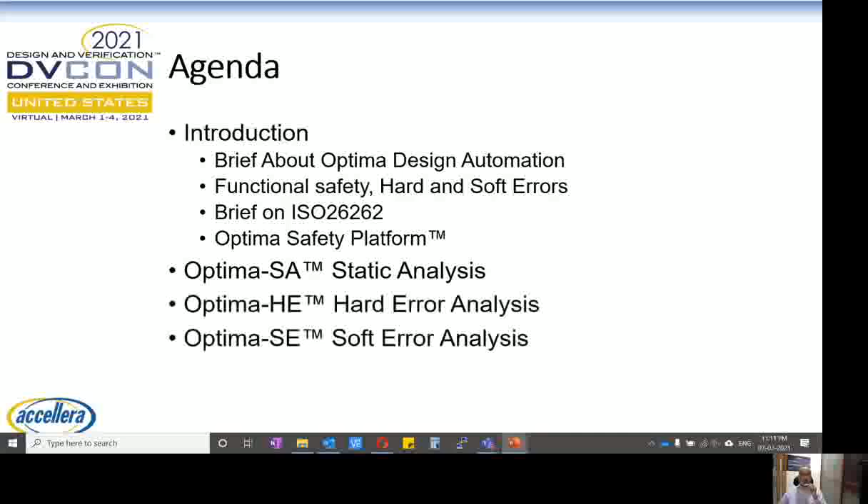2021 workshop on achieving ISO 26262 ASIL metrics using modern static and dynamic failure mode fault analysis by Optima Design Automation. The agenda today: introduction on Optima Design Automation, functional safety, hard and soft errors, a brief on ISO 26262, and Optima Safety Platform, followed by details on Optima SA static analysis, Optima HE hard error analysis, Optima SE soft error analysis, and we'll end with Q&A.

Optima Design Automation is the next generation automotive functional safety tool provider, founded in 2014 in Nazareth, Israel. We have a portfolio of advanced solutions for complex safety and security challenges, a revolutionary high-performance fault analysis technology, and we are a well-funded organization with a core team of verification and safety experts.

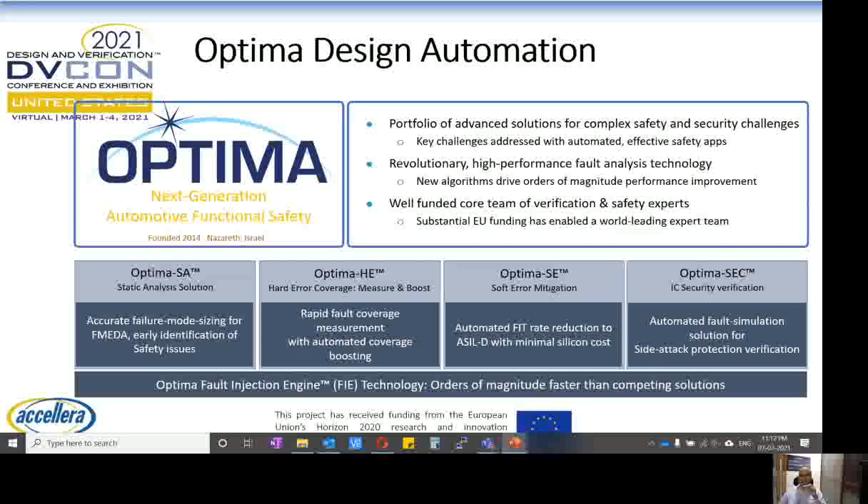Optima fault injection is the core of the technology, orders of magnitude faster than competing solutions. Above the Optima fault injection engine, we have built Optima SA static analysis solution, Optima HE hard error analysis, Optima SE soft error mitigation analysis, and Optima SEC IC security verification. I'm Sesha Kumar, Director of Application Engineering, and I'm a certified semiconductor automotive functional safety professional.

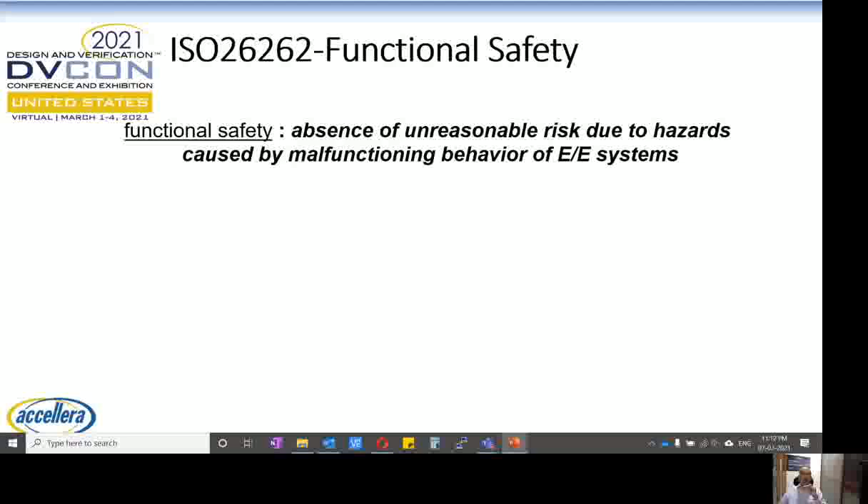ISO 26262 defines functional safety as the absence of unreasonable risk due to hazards caused by malfunctioning behavior of electrical and electronic systems. The average car today uses 300 processors, 50-plus complex electronic control units. It's used everywhere: airbag deployment, event data recorder, voice data communications, accident recorder, battery management, lane correction, parking systems, regenerative braking, etc. There are many functional safety standards available for each and every industry.

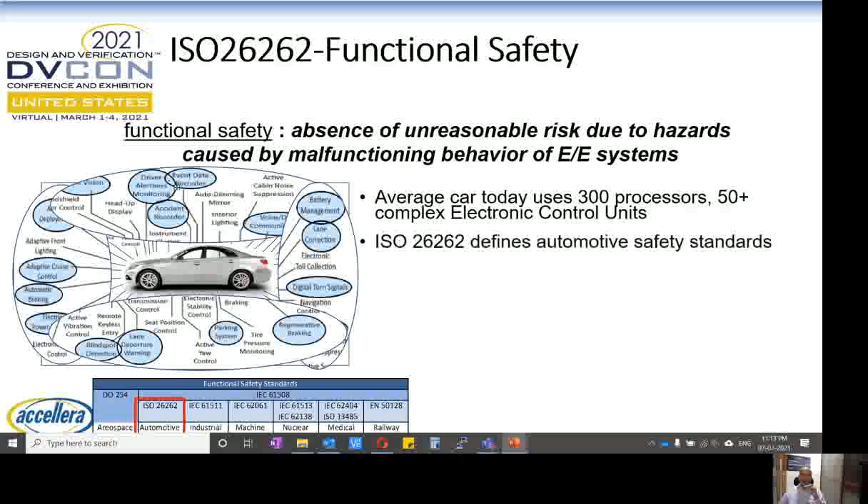ISO 26262 defines automotive safety standards. ISO 26262 follows a V model, which defines the verification process throughout.

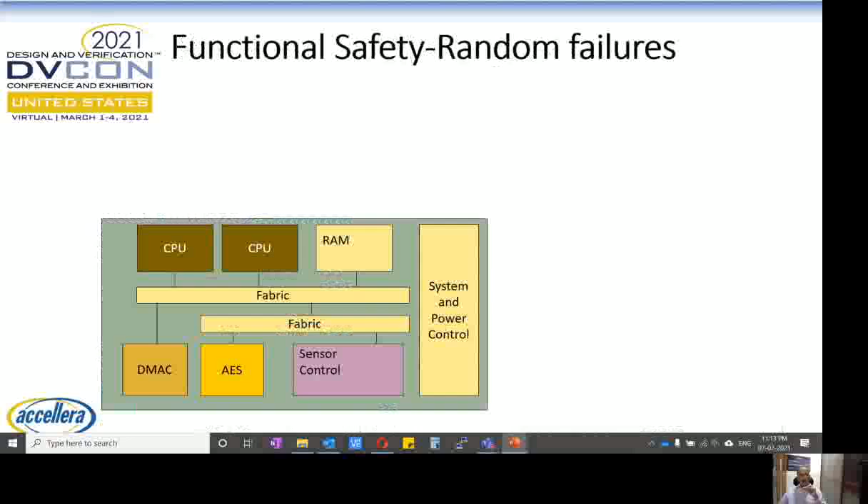Functional safety issues: ISO 26262 defines random faults. Faults that occur during operation can cause failures, termination of intended behavior. To correct random faults' effects during operation, you need to use safety mechanisms.

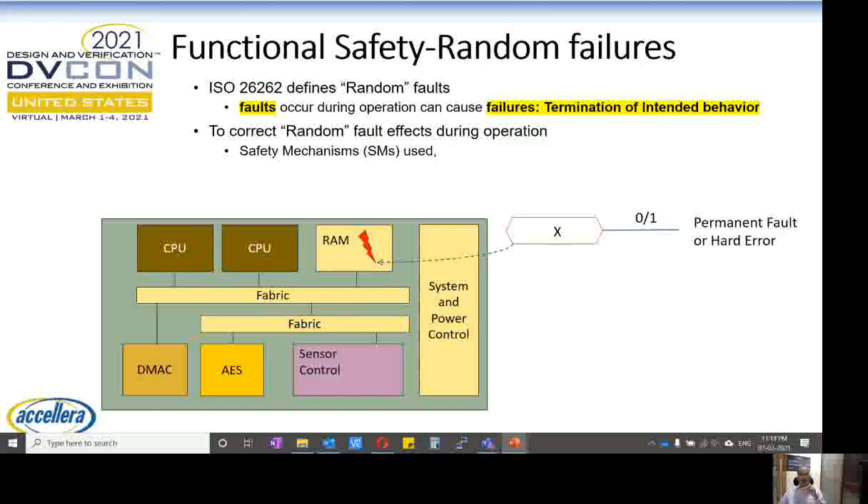Let's consider the ECU depicted here. There is a fault in RAM which can make it permanently 0 or 1, which is called a permanent fault or hard error. So how do you get away with this? You can have a safety mechanism of error correcting code.

You may have a fault in the sensor control unit which makes a temporary 0 or 1, which we call a transient fault or soft error. So how do you get away with this? There can be a safety mechanism with hardened TMR flip-flops.

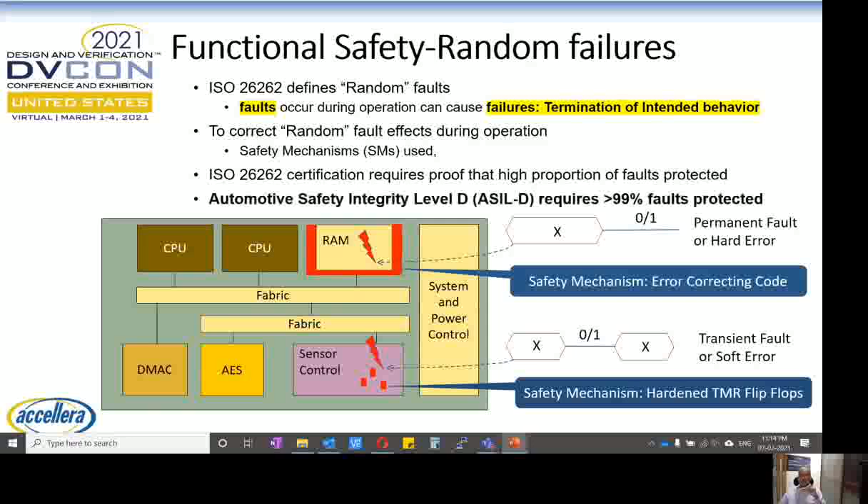ISO 26262 certification requires proof that a high proportion of faults are protected by these kinds of safety mechanisms. Automotive Safety Integrity Level D, ASIL D, requires more than 99% of faults to be protected. So safety mechanism is necessary to detect, mitigate, or tolerate faults, or control and avoid failures.

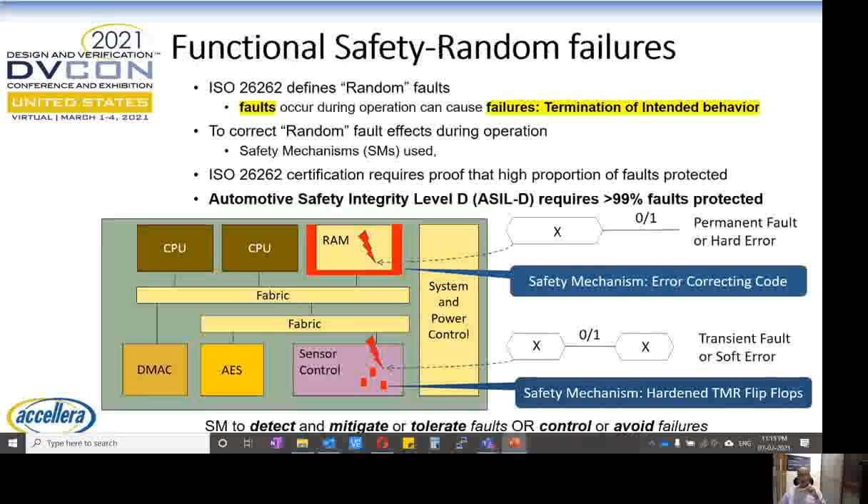We've seen three different terms: permanent fault or hard error, transient fault or soft error, and safety mechanism. Let's throw some light on these three terms.

Hard errors or permanent faults - what are they? They are permanent damages to your transistors. These faults can be modeled as stuck at 0, stuck at 1, or bridging faults. What are the causes? Burn-in, wear-out, or harsh environmental conditions - heat, pressure, or vibration - which is very critical to automotive functions. How do you protect against them?

You need to implement safety mechanisms as suggested in ISO 26262, like lockstep or LBIST. Also, you need to detect faults within 0.25 or 100 milliseconds from the time they happen. These two are critical: detecting them within the time limit and having a safety mechanism to detect or mitigate them.

What are soft errors? Soft errors are also called transient faults, SEU (single event upset), or single event transient. These are bit flips caused mostly by cosmic rays, radiation coming from the sun.

Where do they hit? Memory bits, single or multiple bits, and how do you protect them? Bit dealignment or ECC. They can also hit the gates, combinational logic gates, which we call SET, single event transient, not considered by many experts.

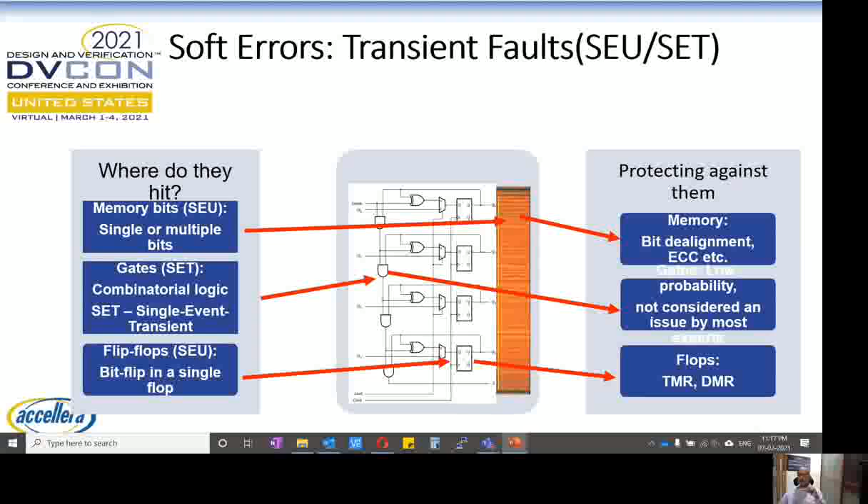The flip-flops, which we call SEU, single event upset, experience bit flips in a single flop, and the protection mechanism for them is the TMR and DMR implementations.

Let's also focus on what a safety mechanism is. This is the new term which we have learned. A safety mechanism can be used for detection, mitigation, or detection and mitigation. So here we see how we detect them.

Let's consider an E10GMAC. This is your DUT under consideration, which we call DUSA, Design Under Safety Assessment. The E10GMAC has unit inputs and outputs that control vehicle parameters. Let's say there can be faults that occur inside the GMAC.

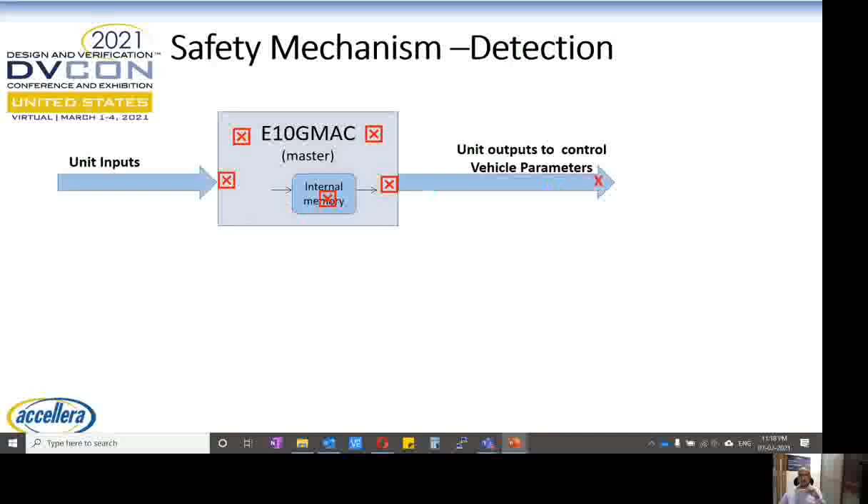So one of the faults can pass through and affect the vehicle parameters. That actually violates the safety goal. The failure, as defined in ISO 26262, is the termination of intended behavior. That means a fault that occurred inside the E10GMAC has actually violated the safety goal.

So how do you detect them? Safety mechanism is supposed to detect, mitigate, tolerate faults, control, avoid failures. Let's have another E10GMAC, which we call the shadow. Give the same inputs, take out the outputs, and compare with the master E10GMAC. So now the fault also goes to compare your outputs, and one unit is functioning faulty and another unit is functioning correctly.

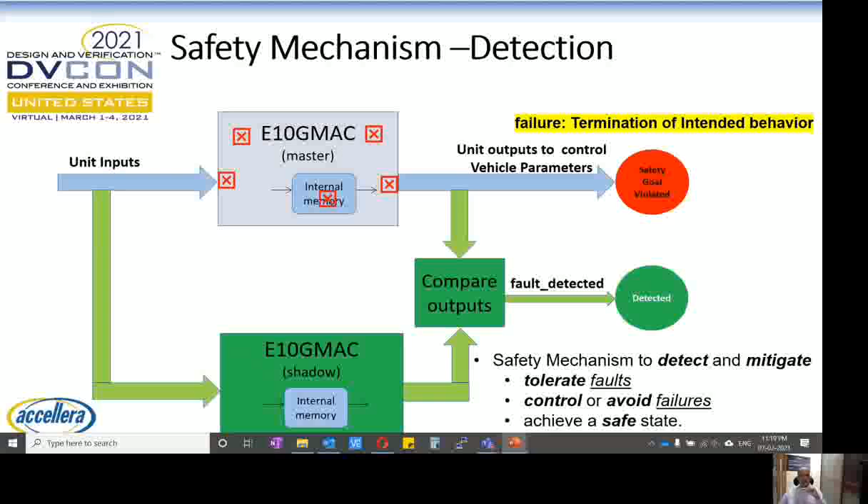The faults that are occurring in the E10GMAC master are controlling the vehicle parameters and violating the safety goals. So in a way, we are detecting a fault that occurred in the master. Probability of multiple faults occurring in both of the MACs is very, very low. So in this way, you're actually detecting the fault.

How do you mitigate as well as detect? So now instantiate another shadow E10GMAC. So now two of them are functioning correctly and one of them is faulty. There will be a majority voter that actually gives the output to the vehicle parameters. And because two of the MACs are functioning correctly, you always get a correct output, and there will not be any safety goal violated because of the master E10GMAC having some faults.

Again, the principle here is the probability of faults occurring in all three simultaneously is very, very low. Here, the safety mechanism, which is two MACs and a majority voter, is actually making the mitigation mechanism possible. So here, the fault is not detected, but you always get the right output. There are latent faults present in the system. You can also have a detection mechanism, and the fault can be detected. So in that way, you can remove the latent faults.

So simplifying the ISO 26262 requirements: semiconductor chips need to have a safety mechanism to detect or correct faults within the budgeted time interval. The safety mechanism needs to be running continuously while the device is operating. And we should have a diagnostic coverage for this safety mechanism and need to be able to cover not less than N%. For example, ASIL D should cover more than 99%.

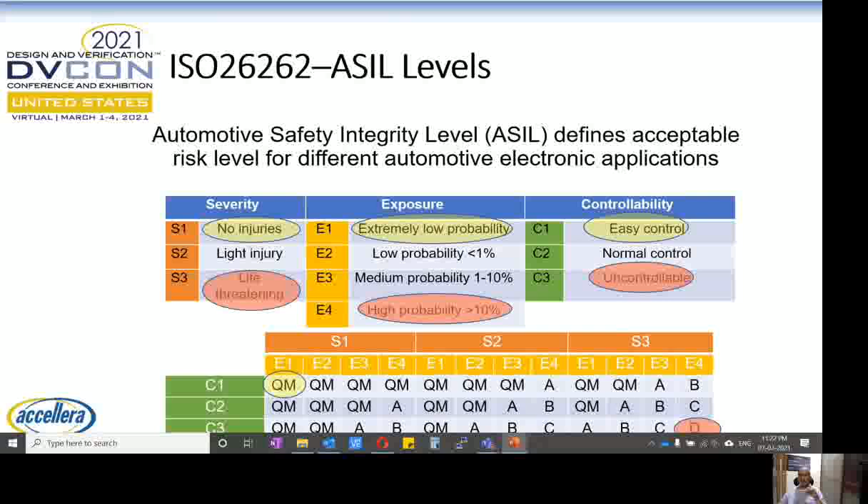So there are ASIL levels A, B, C, D, and D will be at the top of the ASIL levels. ISO 26262 defines different fault types and also the metrics related to that.

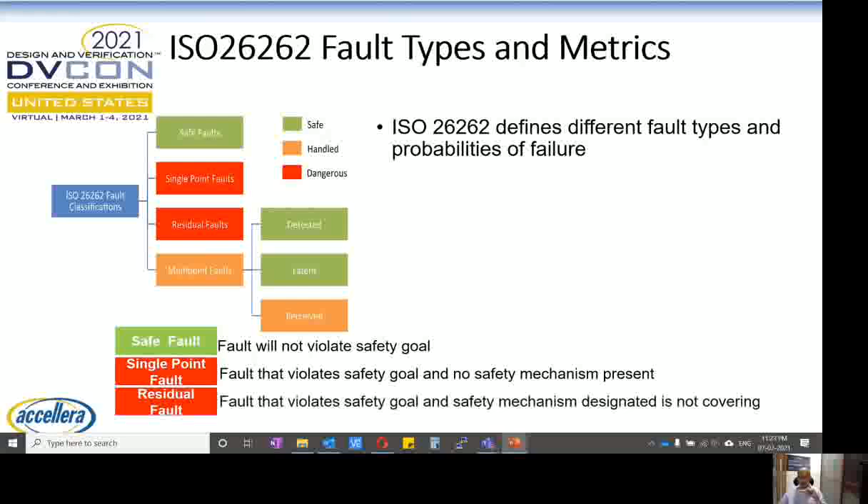Safe faults: faults that will not violate the safety goal. Single point fault: a fault that violates the safety goal and there is no safety mechanism present. Residual fault: a fault that violates the safety goal and there is a safety mechanism present, but it is not covering enough. Multi-point faults: the combination of more than one fault that violates the safety goal.

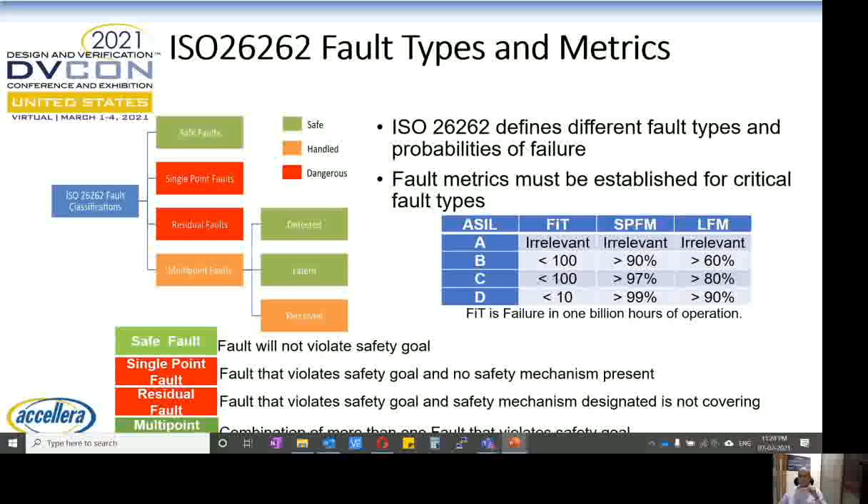Fault metrics are defined for each ASIL level, like fit rate, SPFM (single point fault metric), and latent fault metric. For ASIL D, for example, a fit rate of less than 10 is required, SPFM greater than 99%, and LFM greater than 90%. More details of fit rates while we talk about the soft errors.

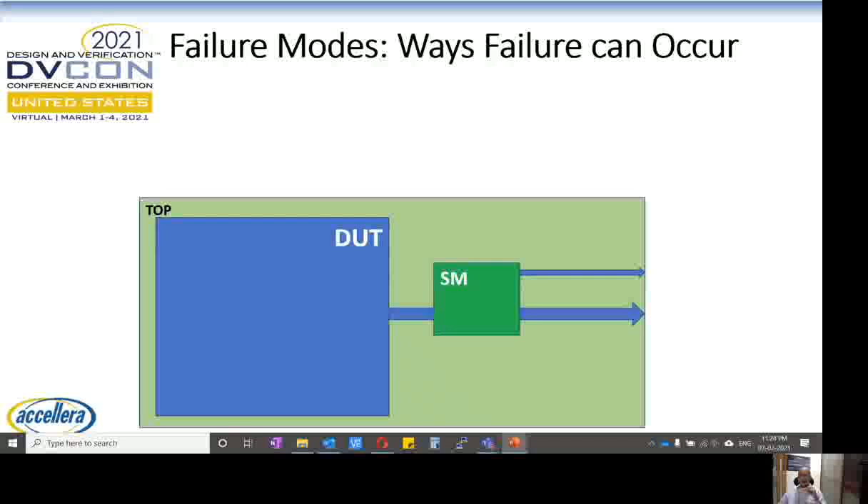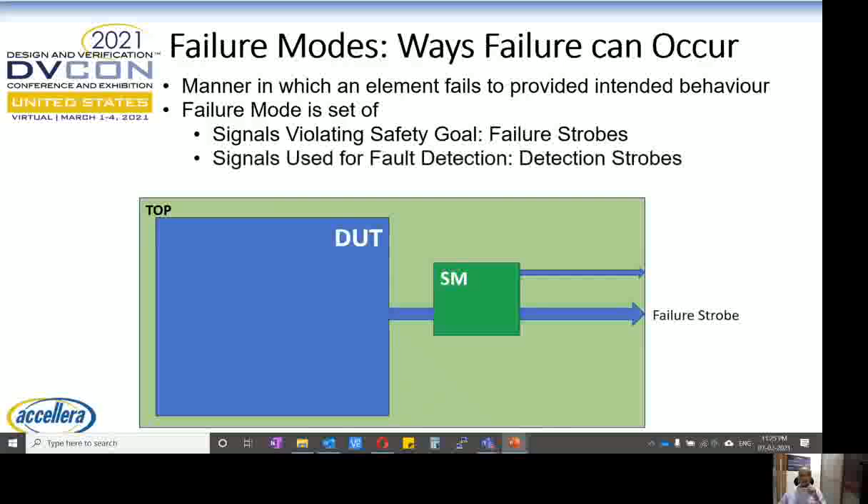Number of ways failure can occur is defined in terms of failure modes. Let's consider a DUT and a top level module with safety mechanism. So failure mode is defined as the manner in which an element can fail to provide the intended behavior. The failure mode is a set of signals violating the safety goal, which are called failure strobes, and signals used for fault detection strobes, faults that cause failures.

So the faults can be all around the place in the design. These are the three different things that define a failure mode.

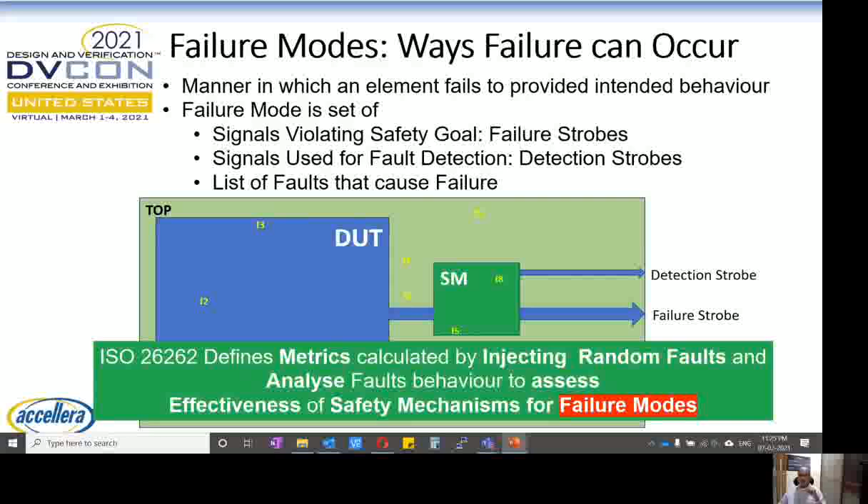ISO 26262 defines metrics calculated by injecting random faults and analyzing these faults' behavior to assess how effective is your safety mechanism for each and every failure mode.

What is the mechanism of measuring fault coverage today? So there can be many faults like depicted here. Fault simulation is used to measure the coverage by injecting faults and simulating repeatedly.

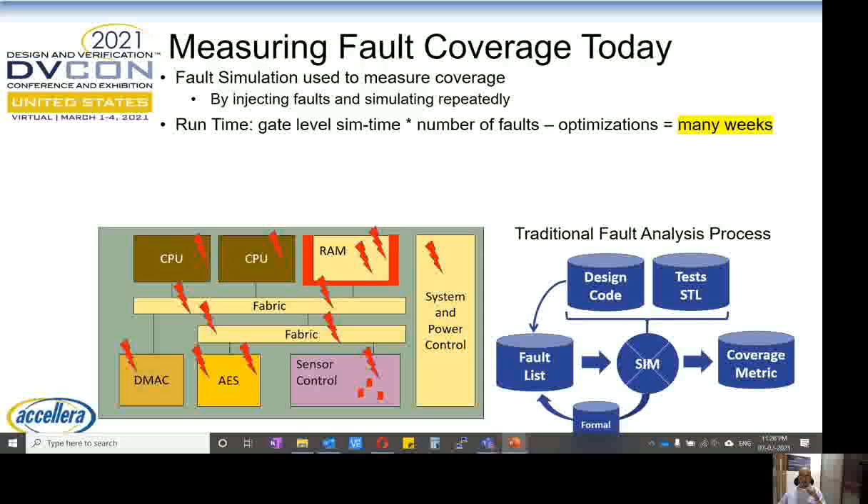Runtime is like gate level simulation time multiplied by number of faults. Even if you do some optimizations, it takes many weeks. And all traditional fault simulators are built on manufacturing tests. They're very slow for automotive. All these traditional fault simulators have complex setup and methodologies that involve multiple tools.

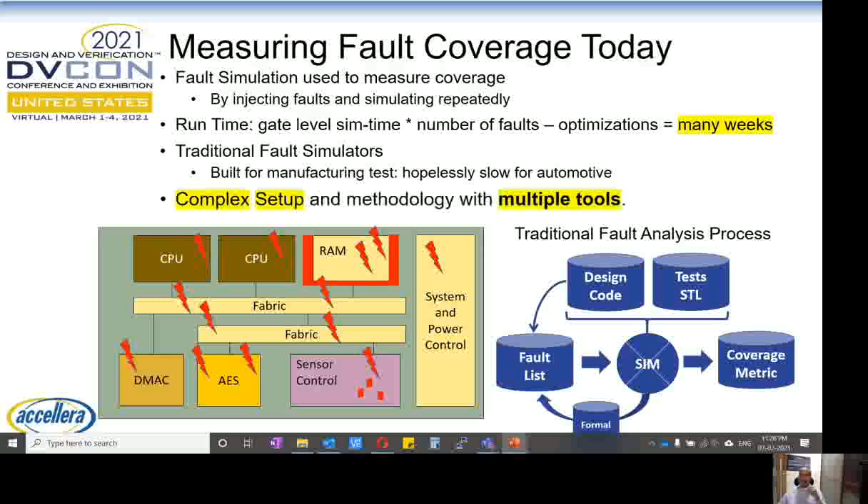What are the challenges in FUSA verification currently? Failure mode identification - so optimal failure and detection strobes and faults is the key. Number of faults to analyze - there are a very large number as design grows. Design setup for FUSA verification.

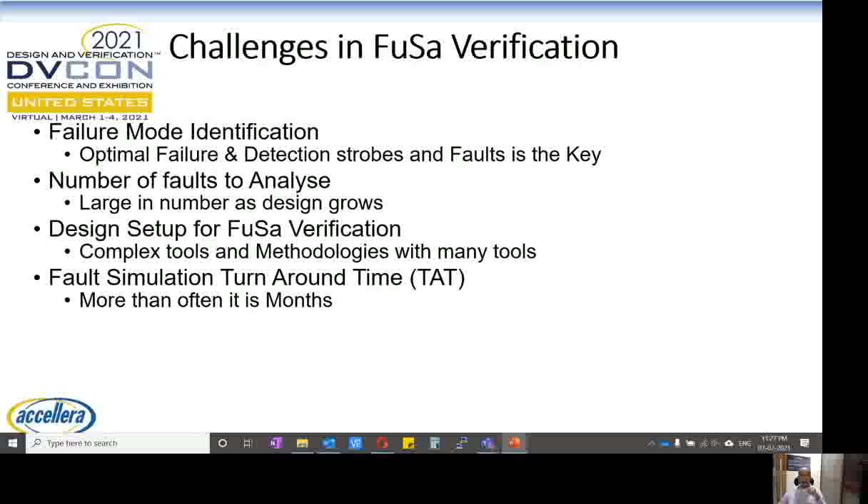Complex tools and methodologies with many tools. Fault simulation turnaround time, more than often it's months. Soft error analysis and selective hardening - all faults or errors are treated the same way, so soft errors have to have a different treatment.

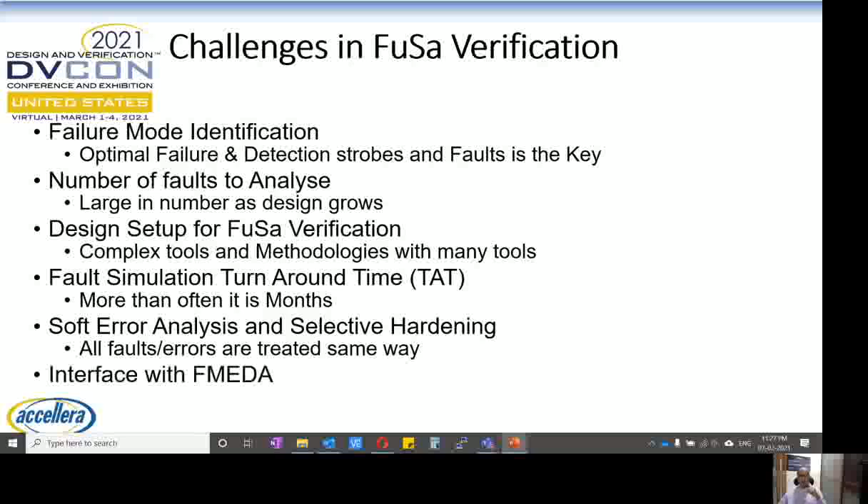Interface with FMEDA analysis - so to get away with these challenges, you need to have the optimized failure and detection strobe techniques, optimization techniques to reduce fault list for various stages of FUSA, simple and single reusable setup throughout the fault analysis. Fault simulation time should be faster.

You need to have a platform to calculate AVF for all the flops in the design, easy to interface with the FMEDA. So to get away with these challenges, we introduce Optima Safety Platform.

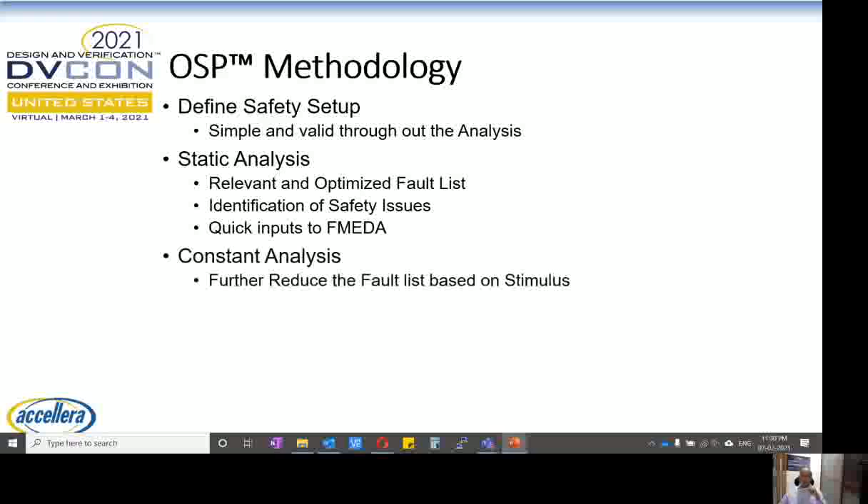Constant analysis further reduces the fault list based on the stimulus. Hard error analysis identifies single point and residual faults and calculates the diagnostic coverages SPFM and LFM. Soft error analysis is done for selective hardening and FIT rate calculations, as well as SPFM for transient faults.

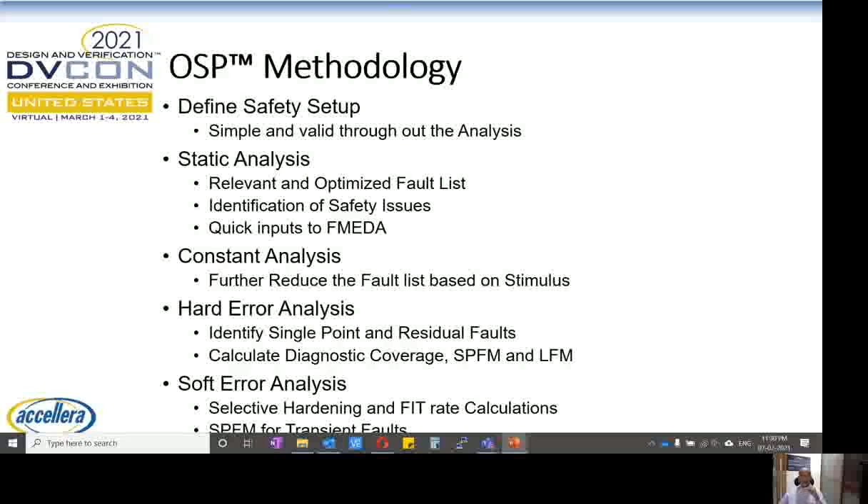Let's look in detail about the Optima SA static analysis. Objective of Optima SA static analysis is to run on RTL or GL. So user can run on RTL to identify safety issues early in the design cycle, and gate level for the final result.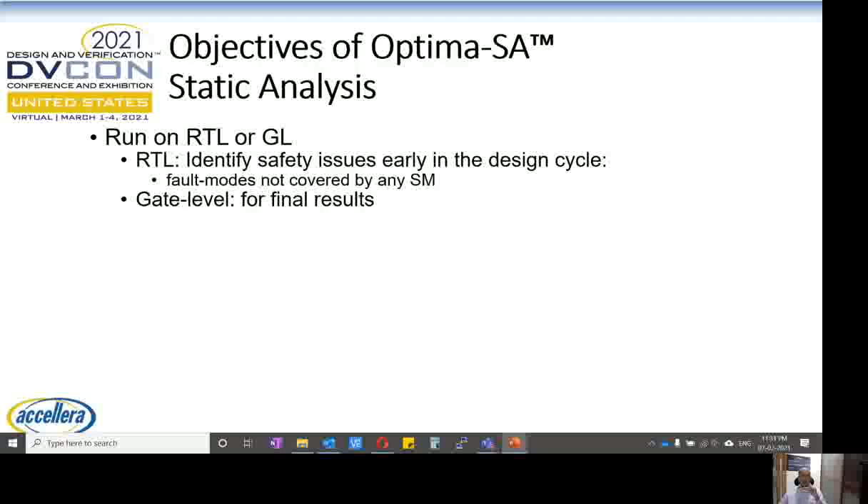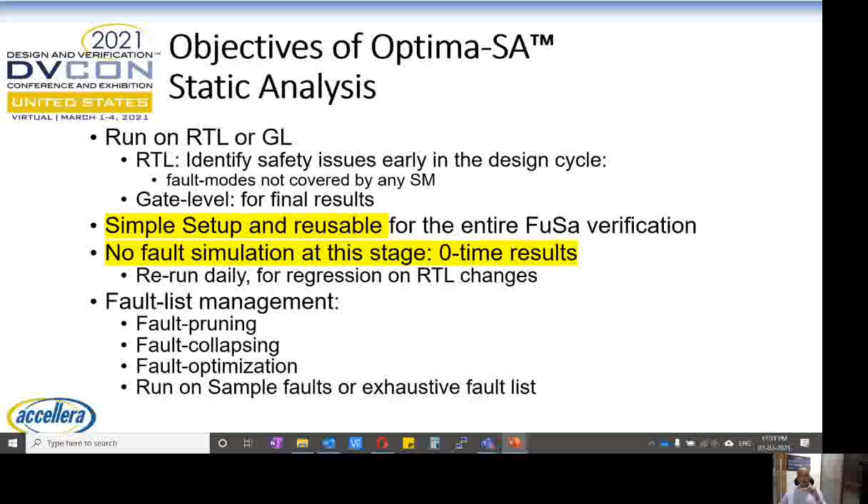It should be a very simple setup and reusable for the entire verification. No fault simulation at this stage, zero time for the results, so that you can rerun daily for regressions on RTL changes. One of the main objectives of Optima-SA is also to manage the fault list by optimizing using fault pruning, fault collapsing, fault optimization, and it should be fast enough so that you can run on sample faults or exhaustive fault list.

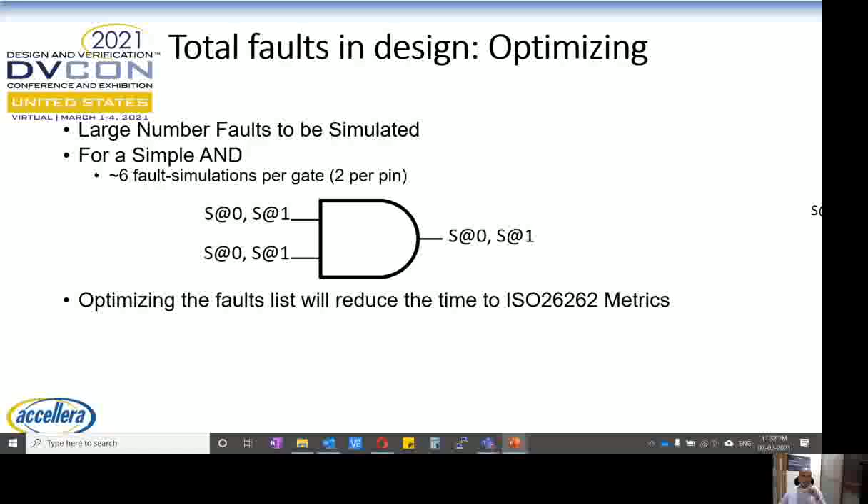Total number of faults in the design is very large as design grows. For example, an AND gate with 2 inputs and 1 output has 6 faults. Optimizing the fault list will reduce the time for the ISO 26262 metrics. Optimization involves placing faults only on the relevant hierarchies, and placeable fault list pruning and placeable fault list collapsing.

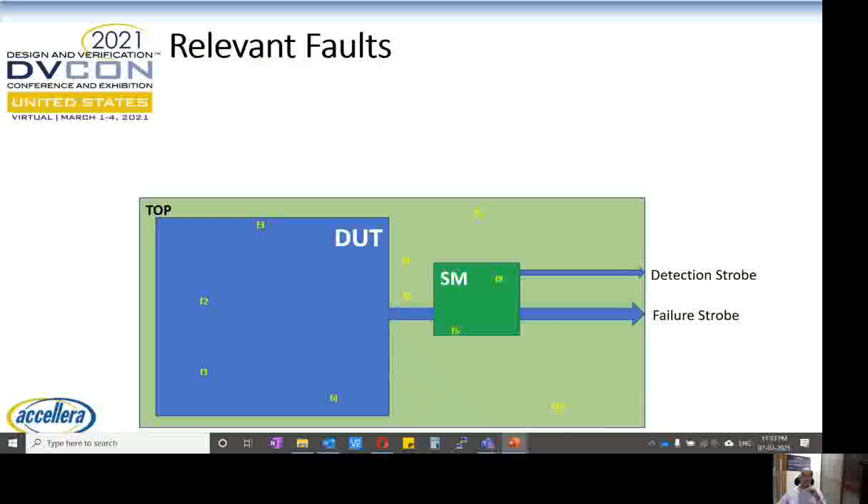What are the relevant faults? So just remember, we considered one SOC, which has DUT and safety mechanism and different faults, having detection strobes and failure strobes identified, which we call a failure mode. So static analysis based on the failure and detection strobe should identify the COI, cone of influence, to be established and find out the relevant faults only.

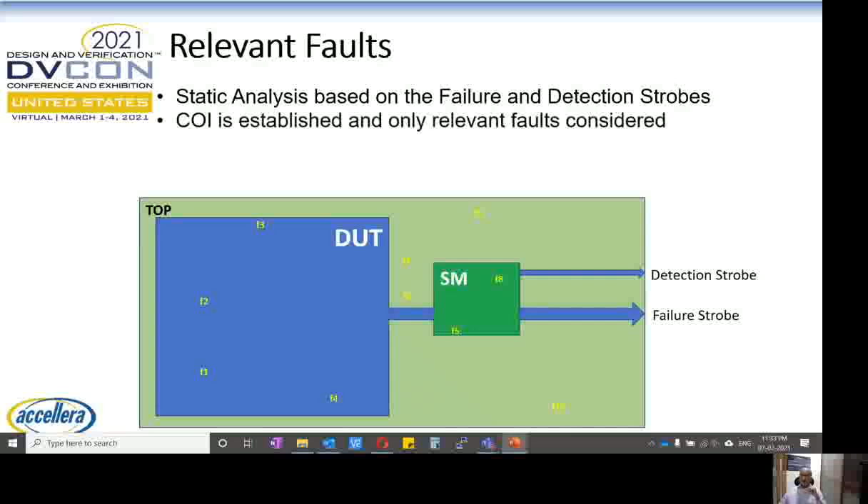You don't need to consider all the faults. A cone of influence is established based on the failure strobe and detection strobe. If you look at the cone of influence based on detection and failure strobes, you can see only F1 and F2 are relevant. The rest of the faults are not relevant at all. Right away, you have reduced from 10 faults to 2 faults only, F1 and F2.

You may see that F5 is also in the COI of failure strobe, but F5 is somewhere else, not in the DUT. Your main objective is to analyze the DUT for faults and the effectiveness of the safety mechanism.

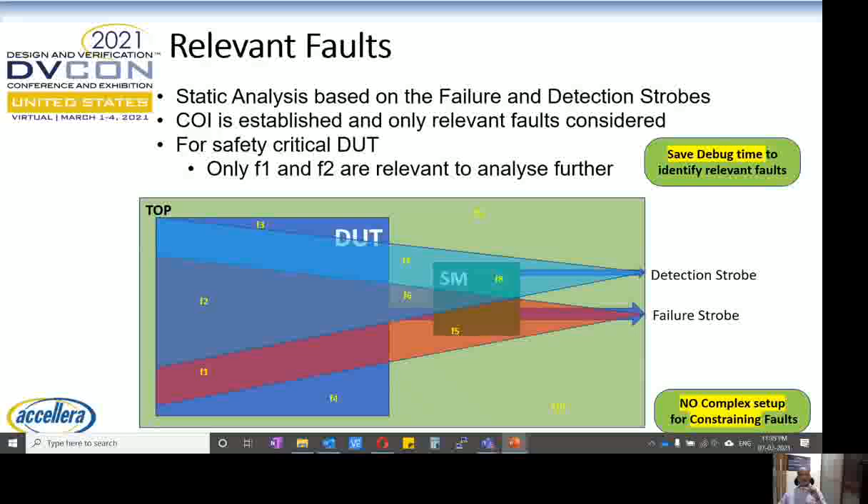This saves a lot of debug time to identify relevant faults, and there is no complex setup for constraining faults. Optima-SA straight away finds F1 and F2 as relevant faults and does analysis only on those two. It also does fault collapsing, which is finding the equivalent faults at the inputs and outputs.

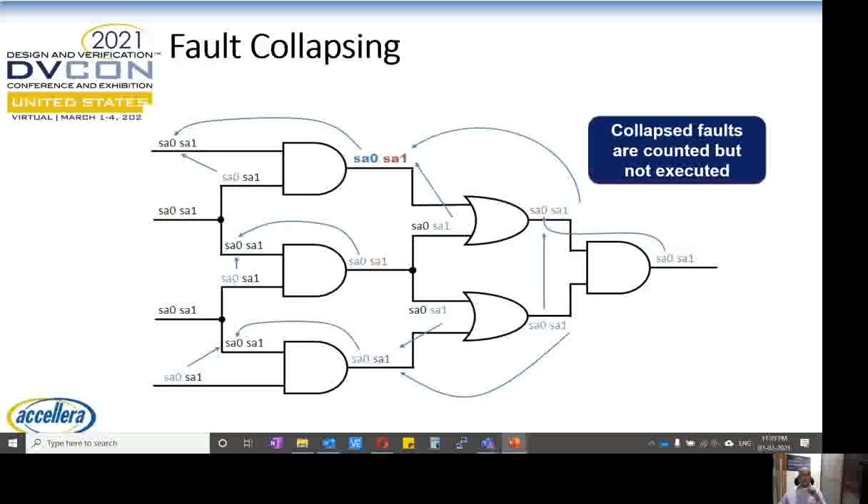Consider only the relevant faults. Collapsed faults are counted but not executed. In this way, you can save a lot of time.

So how do you define the safety setup? We've been hearing the term safety setup for quite a few slides. Let's consider DUSA, which is the design under safety analysis, with primary inputs and primary outputs.

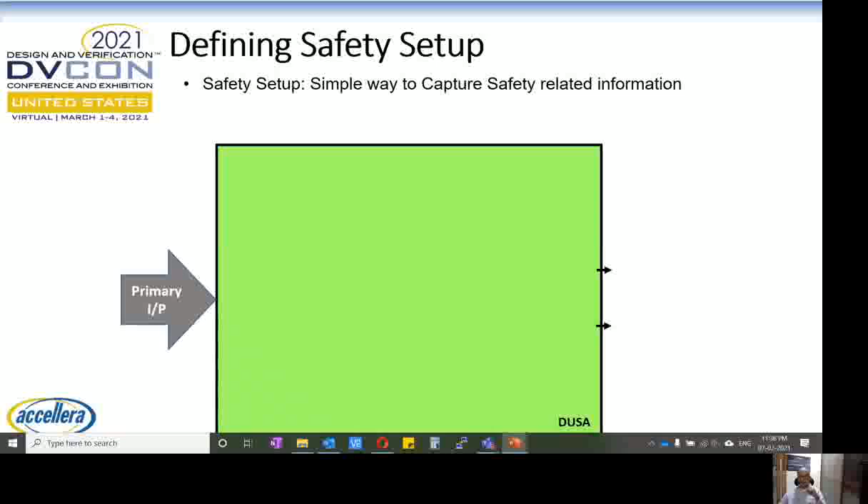Safety setup is simply the way of capturing your failure mode information, safety related information, failure strobes, and condition signals. Sometimes the failure has to be measured with a condition, so failure strobes are defined with condition signals, and detection strobes with their condition signals. These detection and failure strobes can be internal signals or primary outputs. A COI is established for failure strobes, and a COI is also established for detection strobes.

Let's consider if a fault occurs in the complete DUSA area, what are the effects of these faults? A fault occurring in this red region ends up at the failure strobe, meaning it causes the DUSA to fail. So we call these faults unsafe, because they end up at the failure strobe.

Similarly, it is not going to the detection strobe, only ending up at the failure strobe, so it is invisible. We call it UI, unsafe invisible. Safe invisible means it is safe because it's not ending up at the failure strobe, and invisible because it's not ending up at the detection strobe either.

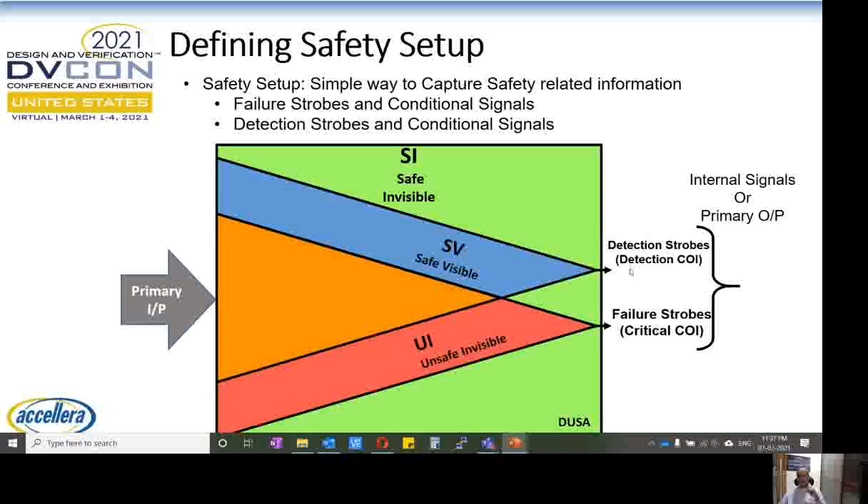Similarly, we can call a fault occurring in this blue region SV, safe because the fault is not ending up at failure, visible because it's ending up at the detection strobe. UV are the faults between these two COI regions, the intersection of the blue region and the red region.

We call them UV, unsafe visible. Unsafe because they end up in the failure strobes, visible because they end up in the detection strobes. These are the potentially detectable faults, and this is the area of interest for further analysis.

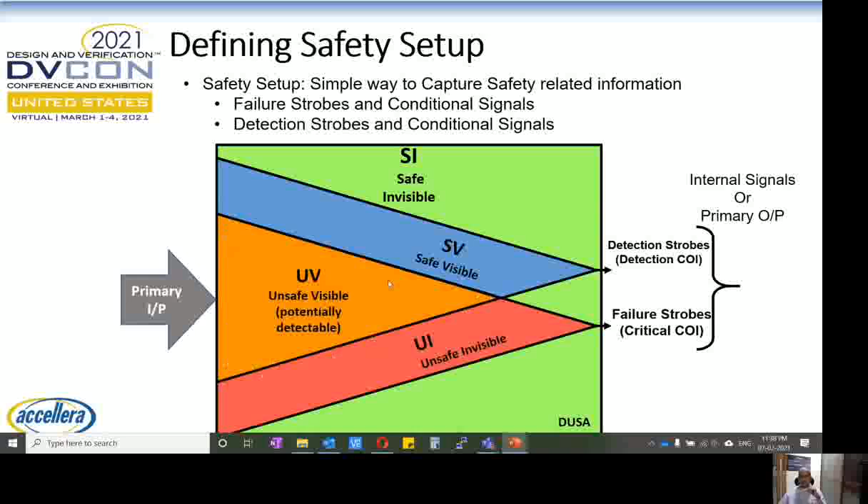So how do you define safety setup? It's a simple command with detection strobes and set fault strobes. If you use -default, that means all the primary outputs are considered for the failure strobes, and you need to use the prepare command.

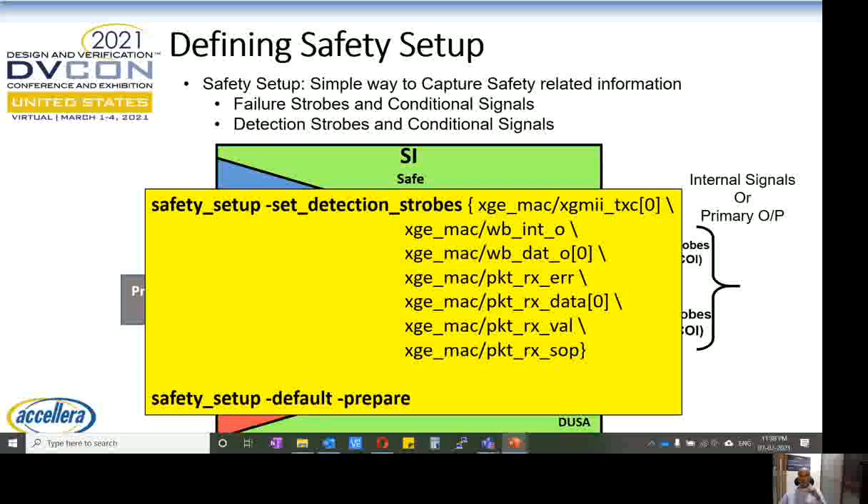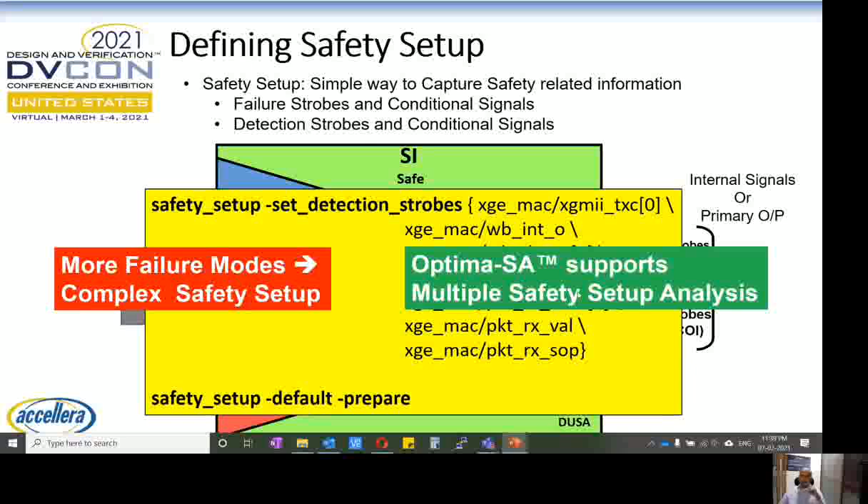As more and more failure strobes and safety setups are defined, it becomes very complex. More failure modes make the safety setup more complex. So Optima SA supports multiple safety setup analysis. You can do what-if analysis and arrive at the optimum safety setup.

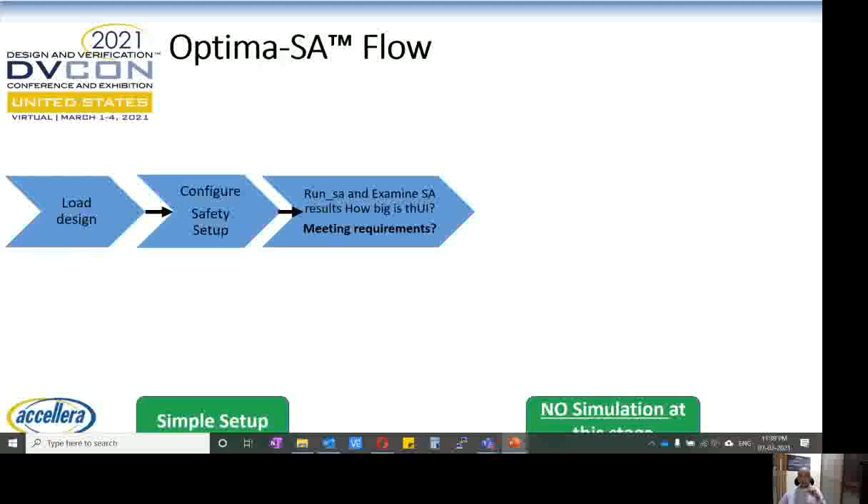The Optima SA flow is very simple, with no simulation at this stage. You load the design, configure the safety setup using the safety setup command, run the static analysis, and examine the SA results. Are you meeting the requirements? Then go to the Optima hard error analysis, which is the fault simulation tool, or export data to the FMEDA tool.

If you're not meeting the requirements, examine the UI area, the faults that are unsafe and invisible as defined earlier. That means there are early safety issues identified by this. If it is invisible, that means you don't have a safety mechanism, so manually you add detection points based on the examination.

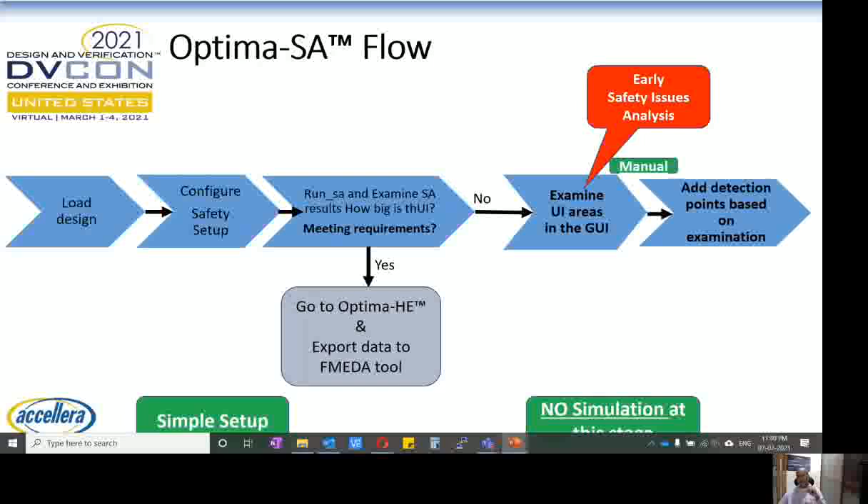This is the manual process. You iterate, run static analysis again, and see if you still find the UI areas. If you have UI faults, add more detection points to make sure they are all detectable. The ultimate aim is to reduce UI to zero, meaning all faults have a safety mechanism and detection point. This is a manual iteration process.

We also have an automated process. You can run the coverage maximizer statically, add detection points based on the coverage maximizer output, and do the iteration again. In this way, you can close the loop automatically as well.

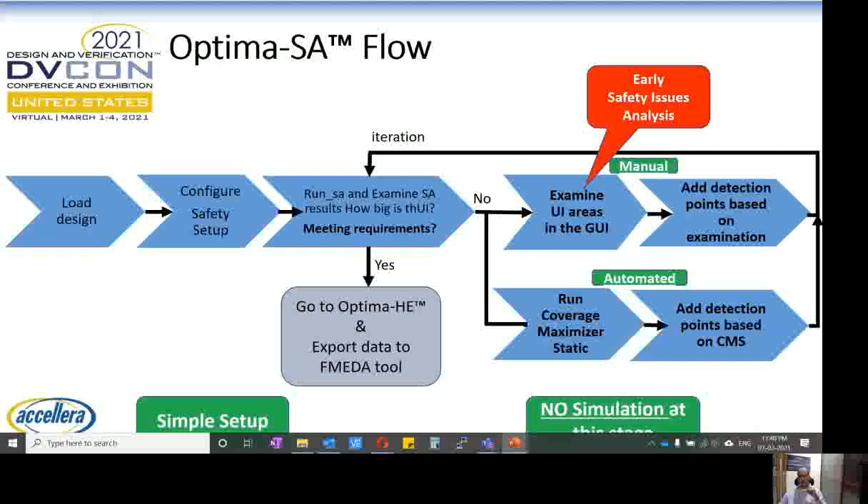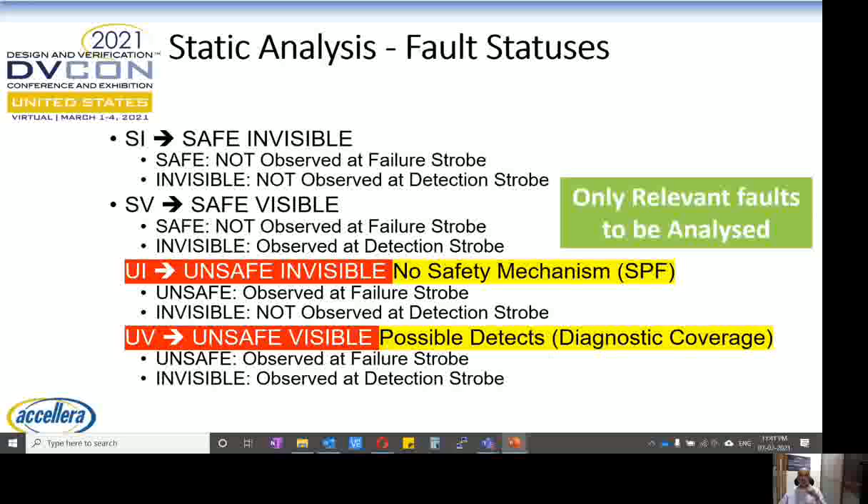So after doing static analysis, what are the fault statuses? SI, safe invisible, SV, safe visible, UI, unsafe invisible, UV, unsafe visible. Only relevant faults are analyzed. The relevant faults here are unsafe invisible, meaning there is no safety mechanism, which forms a single point fault. Unsafe visible faults are possible detects, and these are the diagnostic coverage. So even though not yet simulated, they are detected as possible and can be considered as diagnostic coverage as well.

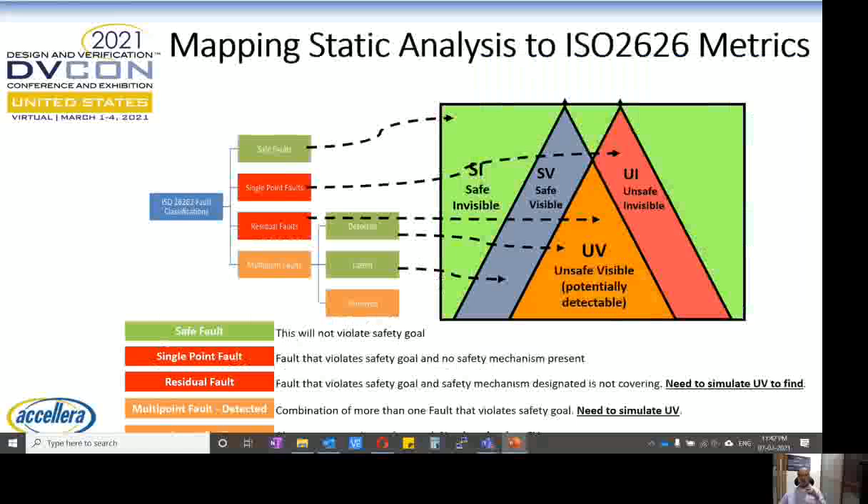How do you map static analysis results to ISO 26262 metrics? Safe faults map to SI, single point faults to UI, residual faults to UV which are to be simulated, UV to be found and detected maps also to UV, and latent faults to SV. So in this way, you have a straightforward mapping of the static analysis results, and you can take these results to the FMEDA manager as well.

Let's look at Optima HE hard error fault simulation engine, HEFS. So how does coverage closure using fault simulation work? Write tests, run fault simulation, check if coverage is met. If yes, you're done. If no, develop methods to improve coverage, fine-tune the tests, and iterate. What are the challenges? It takes a long time for the fault simulation to run, and it's very challenging to find the coverage holes. It's very hard to detect.

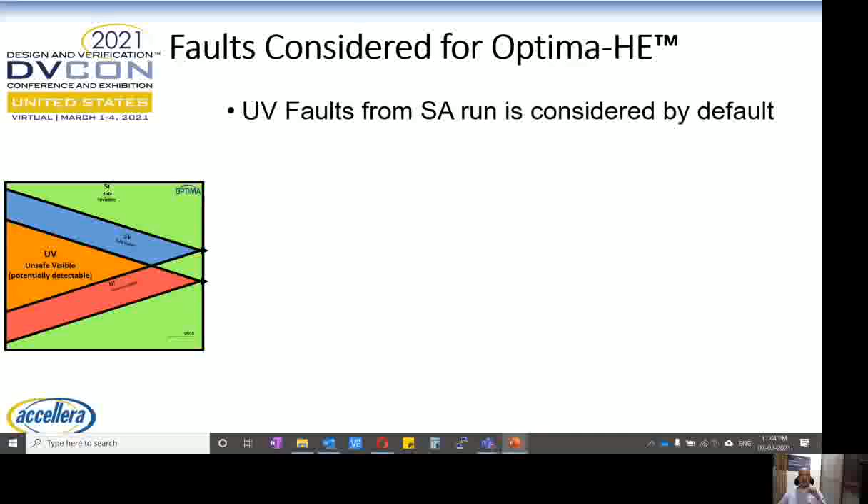To get around these problems, Optima HE actually identifies only UV faults, as we discussed, the UV area from static analysis. Users can also run all the faults or any combination of faults, and faults analyzed by CA. Optima HE has an option to run constant analysis, and whatever faults are marked by constant analysis as blocked, masked, or safe are not considered. So HEFS is run to find how many potential UV faults are actually detected, since whatever static analysis finds is only potentially detectable. You need to run fault simulation to actually determine that a fault can be detected at the detection point.

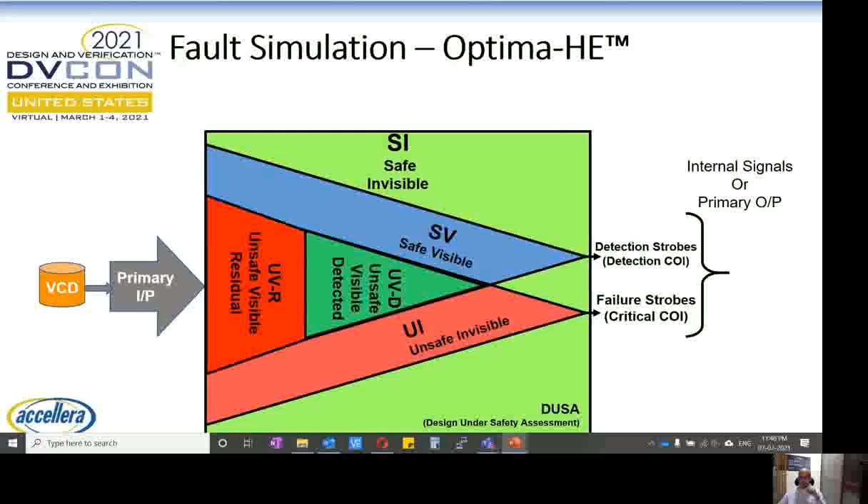So how do you run fault simulation? You have the safety setup and provide the VCD, and you also run static analysis to get all this segregation of faults like SI, SV, UV, and UI. As discussed, only UV faults are considered by default, and the user can run any combination. Once you run UV faults, you get UVD, unsafe visible detected, actually detected by simulation. And there are some faults which are not detected by simulation, so those are called the residual faults.

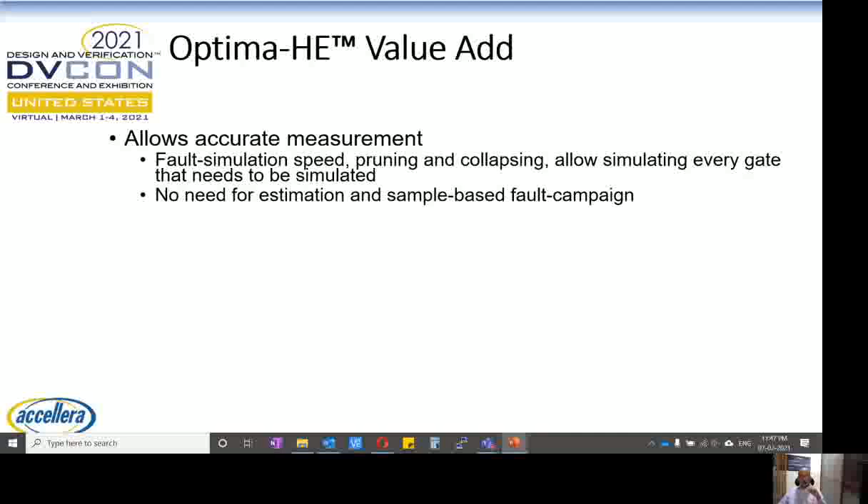What is the value add of Optima HE? It allows accurate measurement. Fault simulation speed is very high with pruning and collapsing. No need to do sample-based fault campaigns. It reduces the wait time, and it's an immense reduction of compute power needed for FUSA verification. And FUSA work can start early in the project because Optima HE works on RTL as well, allowing good estimation and effectiveness of your safety mechanism very early in the project cycle.

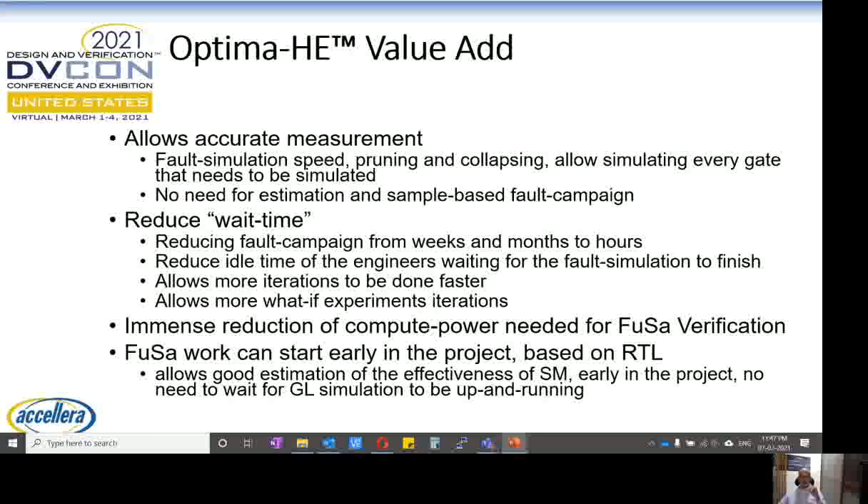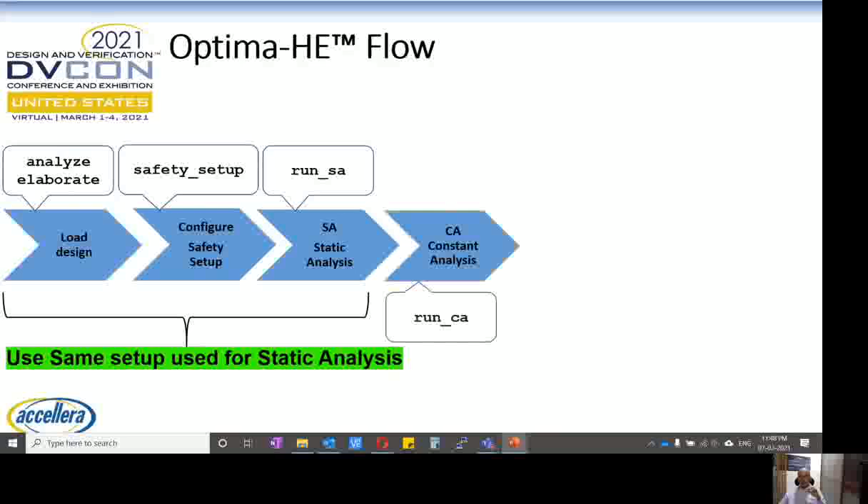What is the Optima HE flow? Load the design using the commands for analyze and elaborate. Configure the safety setup, safety setup is the command. Then run SA, that is the static analysis, using the same setup as static analysis. Followed by constant analysis, run CA is the command. Then hard error fault simulation, run HE is the command. And coverage maximizer to identify the coverage holes. These three form part of hard error analysis: CA, constant analysis, HE, hard error analysis, and CM, coverage maximizer. So there are only a few commands to use, and most of the setup is reused from the static analysis phase.

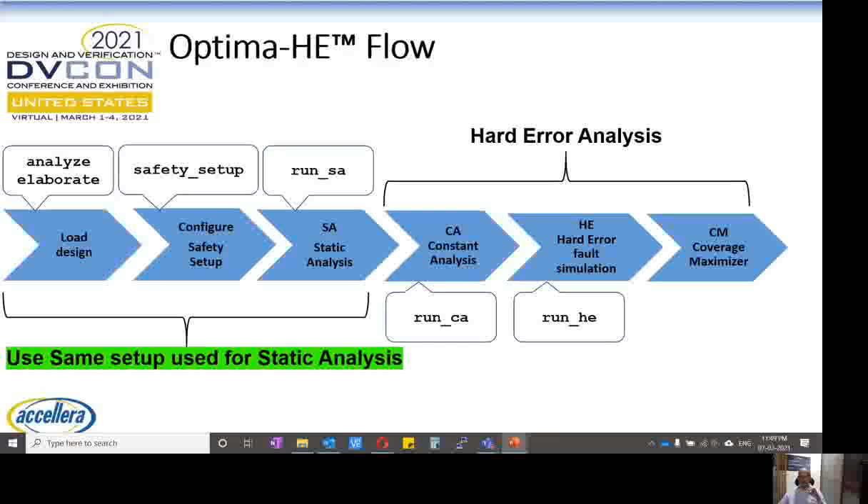How do you map the Optima HE analysis to ISO 26262 metrics? As we have seen, Optima HE runs on UV faults from static analysis, and these UV faults will further be segregated into UVD, which is UV detected, and UVR, which is UV residual. Let's see the whole flow chart of how ISO 26262 metrics are calculated and faults are segregated.

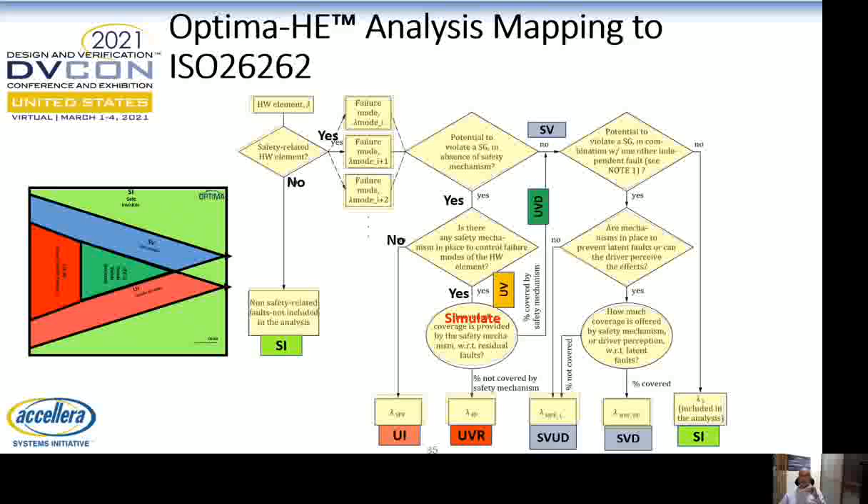So in this way, whatever analysis you have done from Optima SA, static analysis, and Optima HE, hard error analysis, all the fault statuses have been directly mapped into the ISO 26262 jargon. So it's very easy for the user to identify faults and their statuses and calculate the ISO 26262 metrics very easily. Let's look at the Optima SE soft error analysis.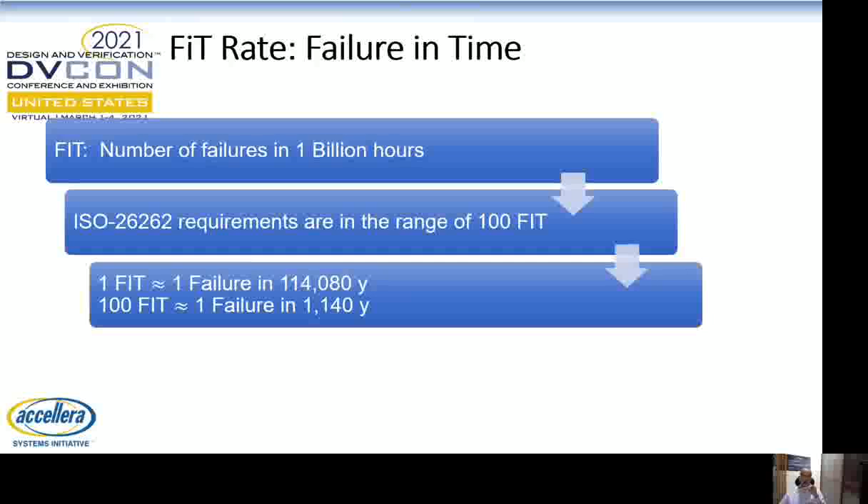Before getting into details of software and its analysis, let's understand what is the fit rate. Fit rate is nothing but failure in time, that is number of failures in 1 billion hours. ISO 26262 requires that the range of fit rate will be at the order of 100. One fit means one failure in 114,000 years. 100 fit means one failure in 1,000 years.

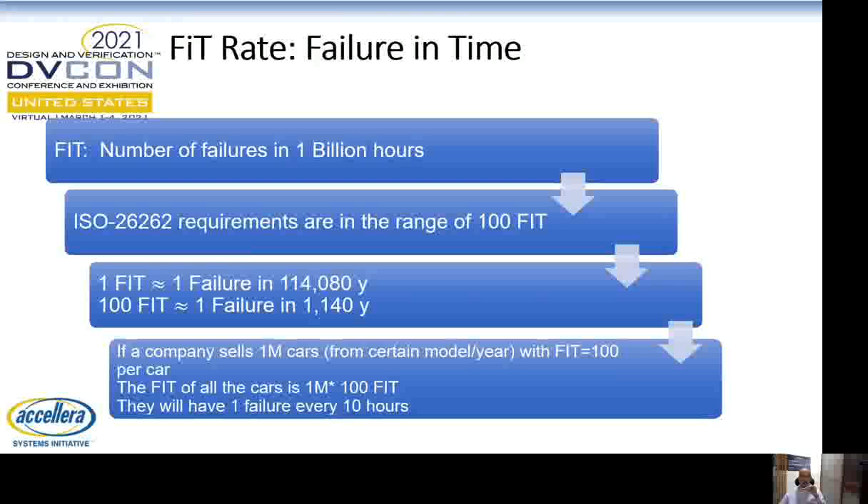Does it really matter? Let's consider if a company sells 1 million cars of a certain model with fit rate 100, that's what ISO 26262 defines. And this company has followed the ISO 26262 standard. So each car has 100 fit rate and there are 1 million cars on the road. So the fit of all the cars put together will be 1 million times 100 fit rate. They will have one failure in every 10 hours. That's dangerous. So to calculate fit rates, you need to worry about SEU faults.

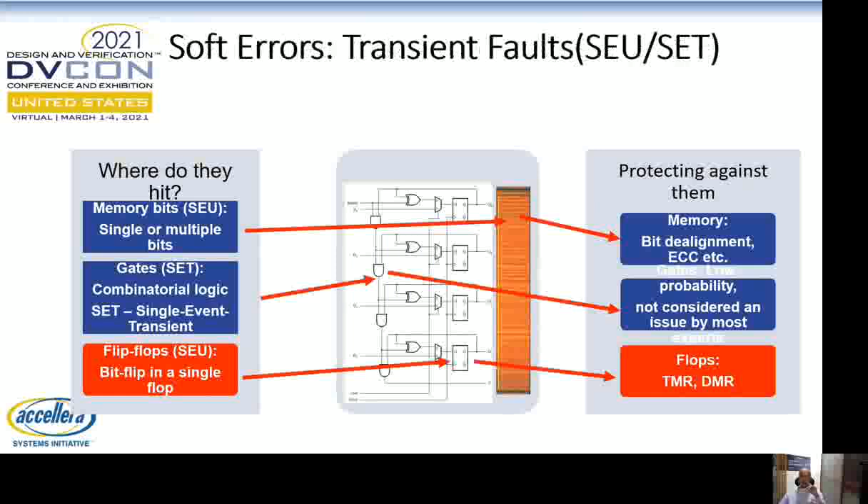We'll be focusing on bit flips in single flops and their mechanisms of avoiding it, like DMR and TMR. So how do you correct it? Like we have already seen, TMR and DMR. So this TMR and DMR can be implemented at the system level or at the flop level.

Let's see at the system level redundancy to avoid soft errors. System level redundancy, you will have lockstep DMR. That means two systems are in parallel working and you take the best out of it. So that means it increases 2x the cost.

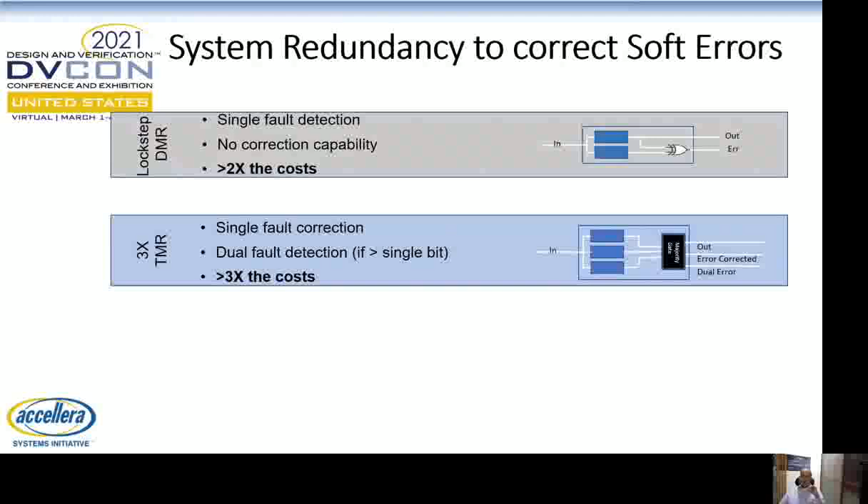3x TMR, that means single fault correction and dual fault detection. That means three systems are in parallel working and there will be a majority voter to give you the correct result. This increases cost by 3x. TMRs of TMRs, that means it can compare three implementations and protect against design errors as well. But look at the cost, it's 9x the cost, very, very expensive.

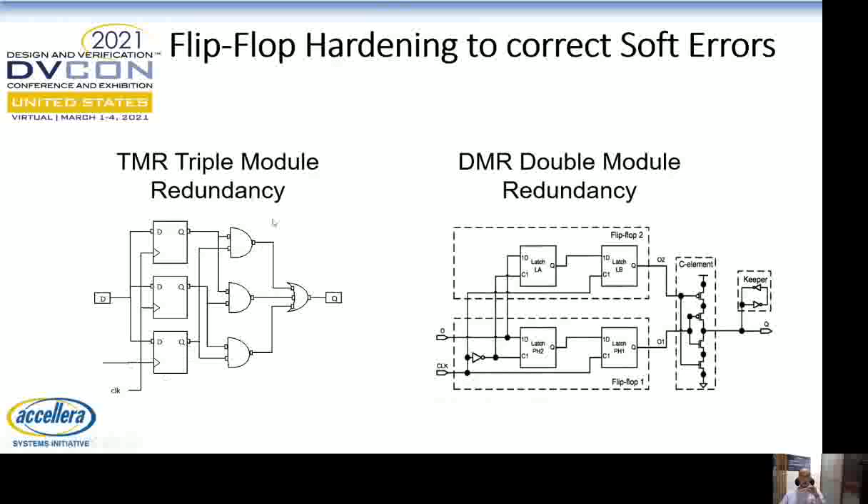We can also have redundancy at the flip-flop level, like TMR, triple module redundancy, where three flops have been instantiated and there will be a majority voter that selects the correct result. You can also have DMR with the C element. If we compare flip-flop hardening overheads, unit level lockstep mechanism will have 70% more silicon, hardening of every flip-flop in the design means 30% more silicon. Only selective hardening, that means 1 to 5% of the flops only can be hardened, means 1 to 5% more silicon.

You can also use older silicon nodes so as to reduce the effect of soft error, or use special radiation hardened silicon technology, which is very, very expensive. Among all these things, what is effective is selective flip-flop hardening, which actually gives an overhead of only 1 to 5% more silicon. Let's look into that in more detail.

So what is selective flip-flop hardening? Hardened flip-flops can eliminate transient faults, so only a small proportion of flops need to be hardened. How do you find out which ones?

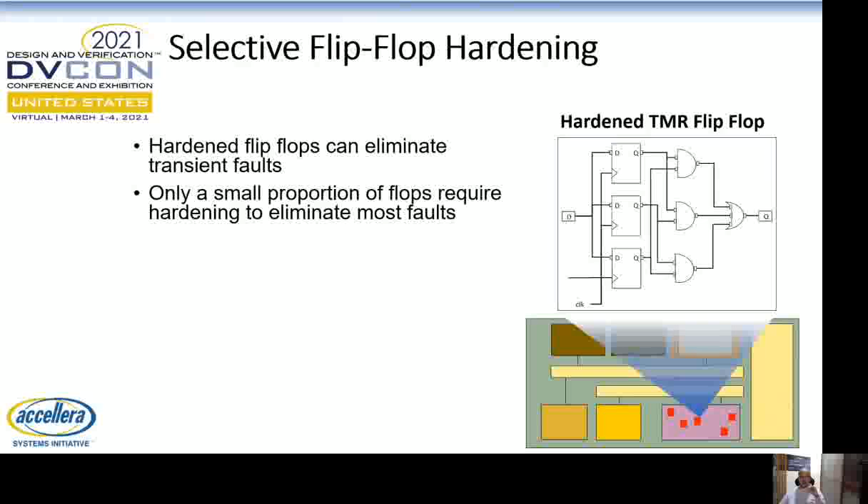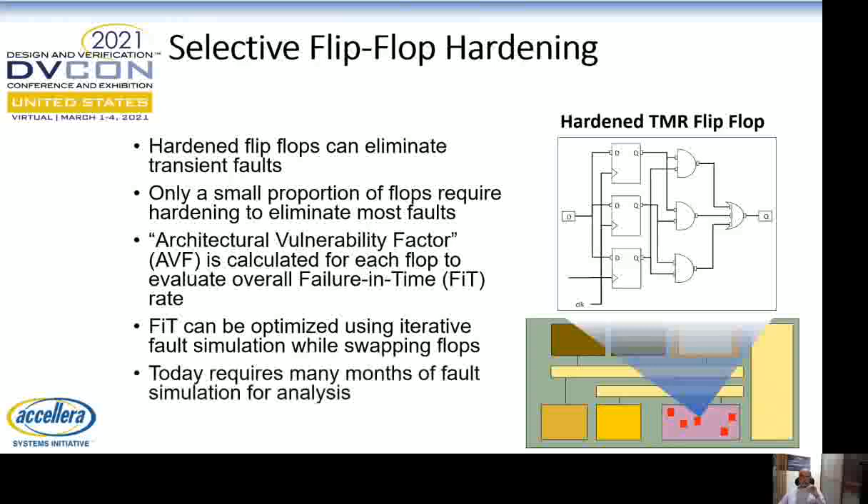We have to find out something called AVF, architectural vulnerability factor, which is calculated for each flip-flop, and the fit rate is calculated based on AVF. This fit rate can be optimized using iterative fault simulations while swapping different flops. Today it requires many months of fault simulation for analysis to find out which flops have to be hardened.

The definition of AVF is nothing but the probability that a fault happens on a flip-flop and propagates to the safety goal output. There can be a lot of flops in the design that are logically masked. Can we leverage those conditions to calculate AVF?

Calculating a reliable AVF involves multiple SEU fault simulations that have to be performed for each flop, and each soft error has to be injected at a different time cycle. Optima recommends 50 to 100 faults per flop at various time cycles.

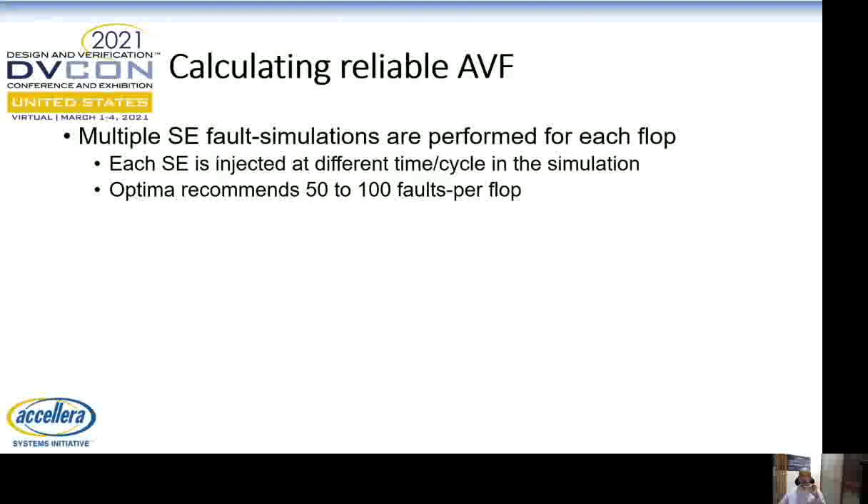So each fault in the simulation can end up with one of the statuses. Propagated: the fault propagated to a safety critical node or the output. Detected: the fault has ended at the detection strobe. Dissipated: the fault has dissipated or disappeared without reaching any of these failure strobe or the detection strobe. EOT is end of trace: the fault sim has reached the end of the trace because it has not ended up with any of the above statuses.

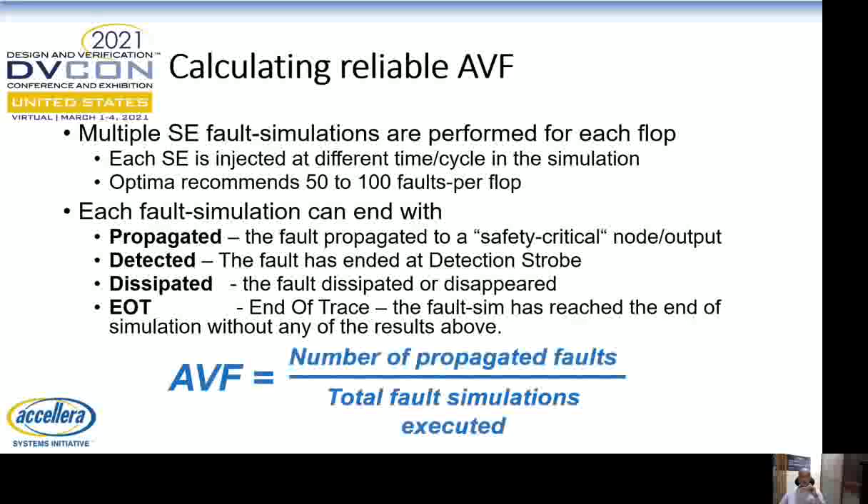So AVF is defined as the number of propagated faults divided by total fault simulations executed. So how do you calculate the fit rates based on this AVF?

Let's assume that you don't know AVF and you have not calculated it. So the fit rate of the chip will be calculated as n number of flops in the design multiplied by the fit rate of an unhardened flip-flop.

Now you find AVF for each flop using Optima SE. So fit rate of the chip now becomes AVF multiplied by the fit rate of unhardened flops. If AVF of most of the flops is close to 0, that means you achieved your fit rate based on the ISO 26262 recommendations, then you stop here.

Now let's assume that you are doing selective hardening only for some flops. So the fit rate of the chip becomes the hardened flip-flops multiplied by their AVF, plus the unhardened flip-flop fit rates multiplied by their AVF. In this way, fit rate can be calculated based on the AVF you have calculated.

And in our observations, the top 5% of the flops, if you can harden it, you may achieve the fit rate. You can accurately calculate AVF and the fit rate as per the ASIL level you have chosen.

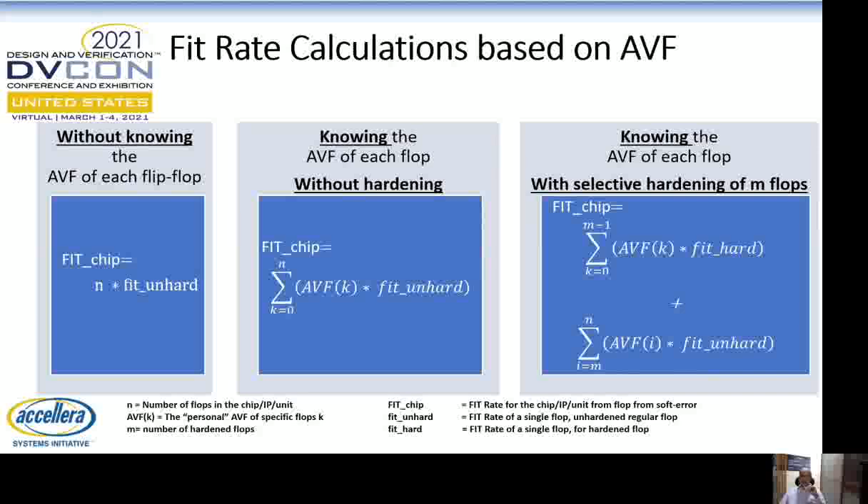So what is the requirement of this soft error analysis? You need to have an ultra-fast simulator like Optima SE and a dedicated integrated app like Optima Safety Platform. Why do you need the fastest simulator? Because you need to do the calculation accurately for AVF, which requires

50 fault simulations per flop multiplied by the number of flops, resulting in millions of fault simulations, and using regular simulators will take a long time. You need a dedicated integrated app like OSP because you need to do multi-million simulations and you need a management system so that you can collect all the results of the flop and calculate the AVF.

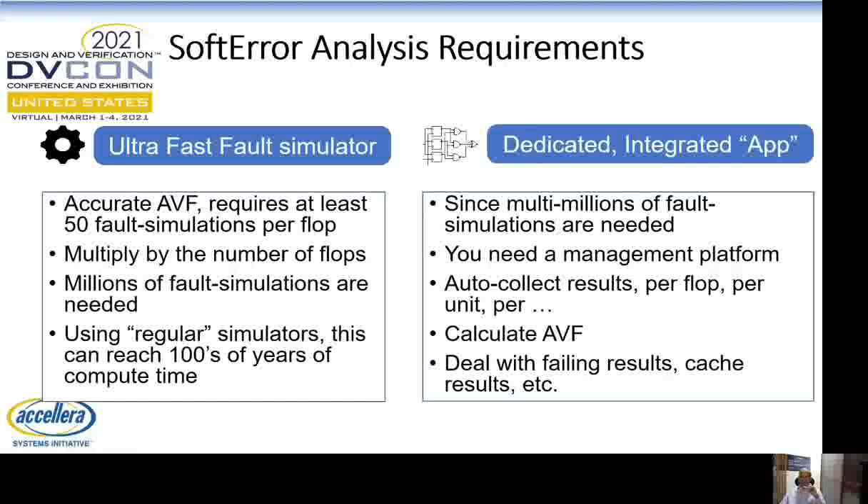So the Optima SE advantage is an optimal and simple safety setup being used. The user can specify the number of faults to be injected on a flop, fault placement times like equal time windows, total stimulus time divided by number of faults, or random placement of the times, and user specified times.

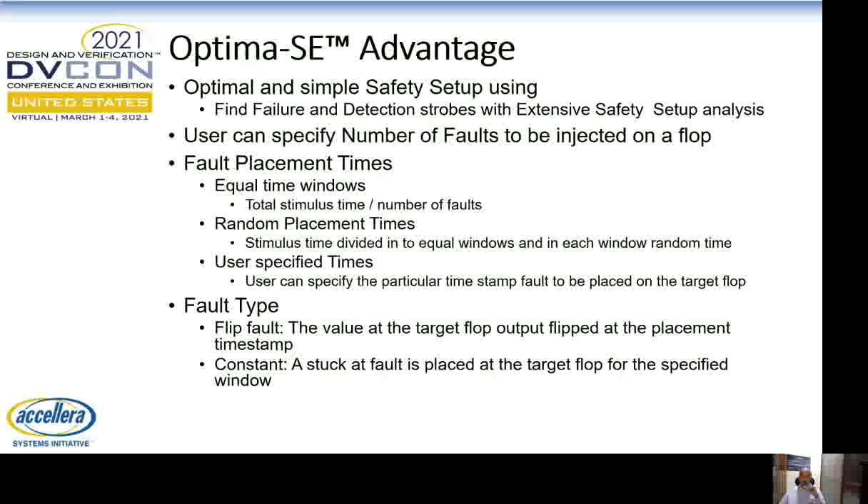Fault types can be a flip fault, where the value of the target flop at the output can be flipped at the placement timestamp, or a constant stuck-at fault placed at the target flop for the specified timing window. This is the fastest simulation engine for AVF and fit calculations, and also for SPFM for transient faults.

This is the overall advantage of Optima Safety Platform. All the engines are built in and the interaction with the user is very easy. Thank you very much. Any questions?